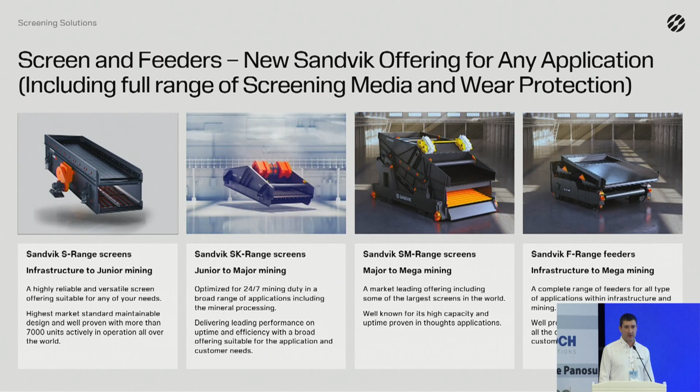And we also acquired the mining business of the famous German company Schenck, which is well known with their solutions in terms of robust screens for heavy-duty applications for big capacities within mining and steel industry. All of these solutions form a really extensive portfolio, and if previously we could call Sandvik primarily a crushing company, now crushing and screening are equally developed at Sandvik, which makes absolute sense because this equipment is equally important for mining companies.

If we are talking about screens, despite looking simple at first sight, they consist of a plenty amount of different details in terms of spare parts for metal structure, in terms of drive units, which are 24/7 under vibration in heavy conditions and heavy duties for mining customers. In a lot of cases, screens play a crucial and critical role for the entire mining plant.

So basically, if we are talking about challenges during the operations of a screen, we can form it into one question for the maintenance and reliability specialists within mining companies: how to minimize downtime and avoid unplanned shutdowns, so as not to let down the whole mining plant. This brings another question. To do this, we need to optimize the process, as well as set up a proper maintenance strategy to keep the uptime of the machine as high as possible.

To do this, we need to understand what kind of service actions are required and when these actions are required. And of course, to understand this, it's better to know the condition of the equipment, and it's much better to know this in real time.

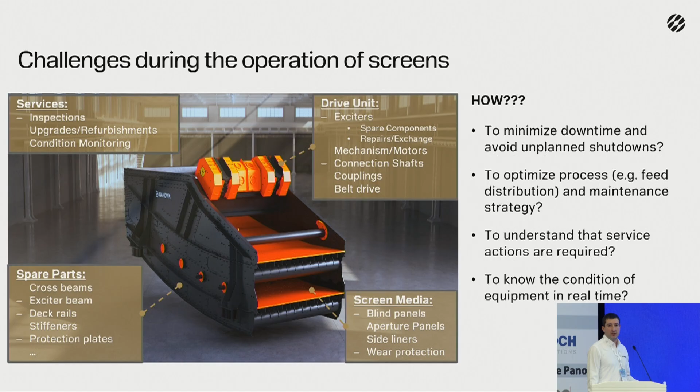To help our customers with these challenges and answer these questions, we developed our automation and connectivity system for screening solutions, which was adopted from the prototype of the Schenck mining business. If we are talking about hardware, the system consists of the following parts.

The heart of this system and the measurement unit is the state-of-the-art wireless and self-powered sensor, which combines new technologies expressed in the magnetic mount and energy harvesting functions that can receive energy from the shaking process of the machine. Depending on the size of the machine, we can use different amounts of sensors, which are basically placed on the sidewalls and exciters.

Basically, these sensors measure the screen motion in all directions simultaneously on the right side and left side, as well as on the exciter. To ensure stable and reliable connectivity and network reliability, we are using transceivers with active antennas.

Depending on the complexity, we use one to three transceivers to ensure this stable connection and to seamlessly transfer the information from the sensors to the gateway and flow unit.

In the flow unit, all calculations are made, and in case of any deviations from the threshold, it generates an alarm. We will see how this looks in the SAM platform a little bit later.

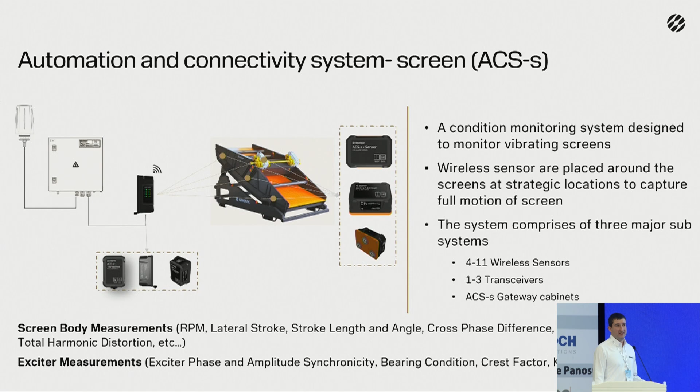Basically, the ACS system is part of the whole digital ecosystem, which we will talk about a little bit later. Data from the ACS system can be easily exported to the digital cloud infrastructure and SAM platform to provide our customers with all necessary reports, dashboards, analytics, and suggestions on how to proceed with the maintenance of the machine.

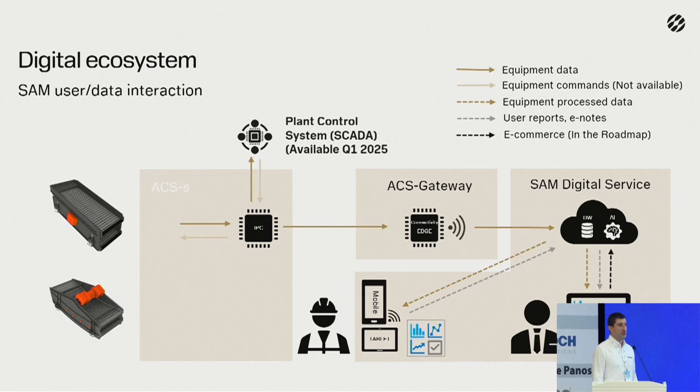As well, it can be exported to the plant control system, because we have some cases when some safety functions are bounded to this system for protective purposes.

Long story short, as a conclusion for the automation connectivity system for screening, we developed the new system consisting of state-of-the-art sensors, which gives our customers full flexibility in terms of installation and data transfer. We created the robust architecture, sensor synchronization, and many different advantages.

Altogether, it gives our customers the main benefit: you can early detect if something's wrong with your machine and prevent it until it's getting serious, and until you have an unplanned shutdown.

Besides, it's good to have data-driven maintenance and maintain the machine not according to a certain schedule, but according to the machine's condition, to keep its uptime as high as possible. Basically, that's all I wanted to say about the automation and connectivity system for screens.

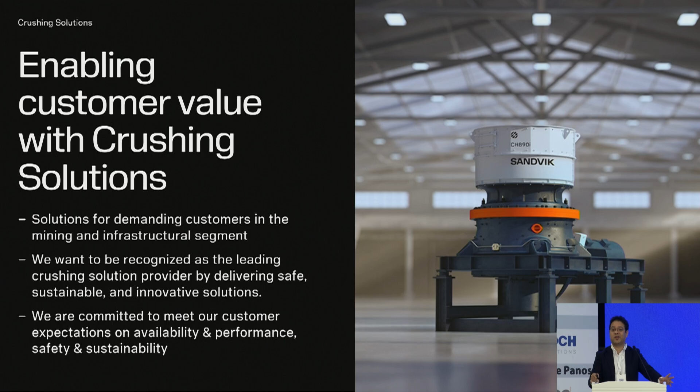At Sandvik, we want to be recognized as the leader when it comes to providing crushing solutions for the mining industry. We understand that our customers are demanding nothing more than the best operational efficiency, maximum utilization, and a machine that is not creating a headache when it's in the real sturdy operations down there in a mine.

For this, we have a comprehensive offering that goes all the way from our 800 series equipment, which includes the latest and greatest advancements in digitalization and also in hardware. These are basically used in secondary applications.

Also going through our 400 and 600 series, which are smaller yet more flexible and can be used in tertiary applications. Not to forget, of course, our jaw crushers and gyratories, which are basically used in large-scale mining applications, and last but not least, our horizontal and vertical impactors, which are used in special needs.

My name is Freddy Ramirez, and I'm really happy to be here and walk you through some of our digitalization, and show you how our hardware and software work together to be able to offer you the best experience when it comes to crushing for mining.

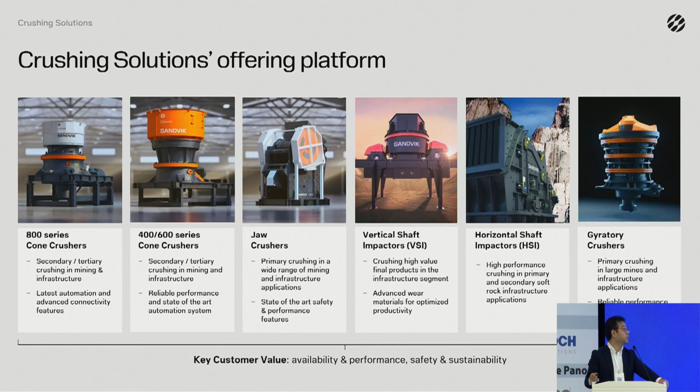The typical challenges that we face in mining operations have to do fundamentally with the ability to achieve the maximum operational efficiency. At the end of the day, we get a machine and we want the machine to last the best, to last the longer, and to be able to provide a consistent output throughout the whole life cycle.

Preventive and predictive maintenance is of the essence. We don't want to stop operations. We want to make sure that we understand when it's time to change components. We want to characterize the processes, and understanding the life cycle of those, it is of the essence.

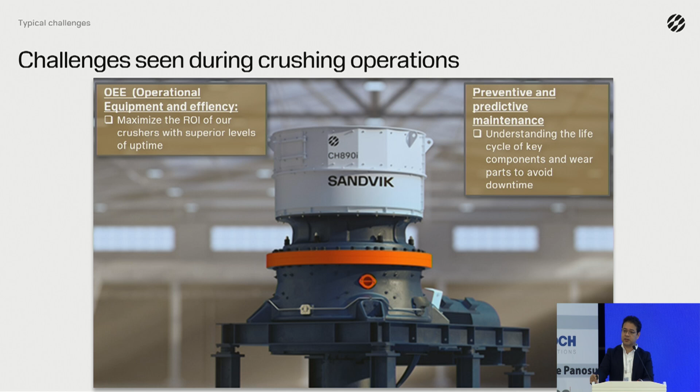Liberation of ores in mining is an important element to be able to allow downstream processes to be as effective as the processes upstream. And of course, the ability to connect to monitoring systems is also quite important. SCADA is one of them.

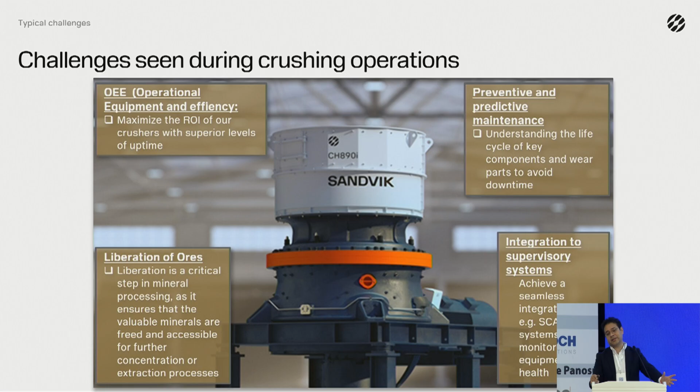And we achieve this through our ACS, or automation connectivity systems for crushers, which in a nutshell consists of having strategically located sensors in our crusher to be able to understand what is happening, what is the health of the machine at any moment in real time, that at the end of the day you can see at the tip of your fingers while you are here enjoying this event. You could also be seeing what is happening at your mine or quarry.

Through the ACS, we're able to detect abnormalities. We are able to also monitor crushing size, particles, pressure, temperature, recirculation, and at the end of the day, if the machine is being utilized at its full.

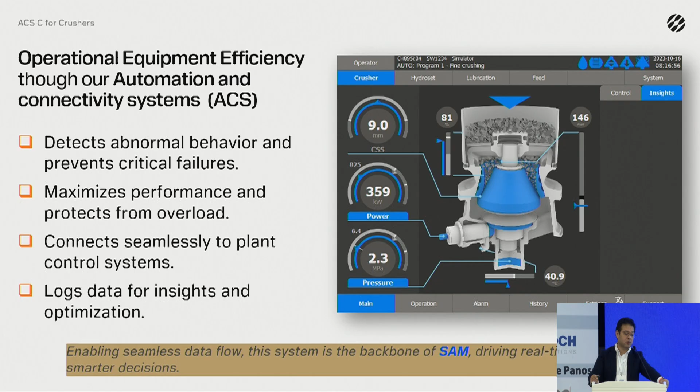Some of the features of the ACS have to do with enabling the operator to have a holistic crusher control, to have automation in terms of adjusting the wear ratio, or through enabling to adjust the close side setting to have the same particle as the machine is going through normal wear and tear. Also, it allows to have automatic settings and, of course, monitoring of key parameters. This, together with smart hardware integration, allows to provide the best maintenance service with minimum effort and time.

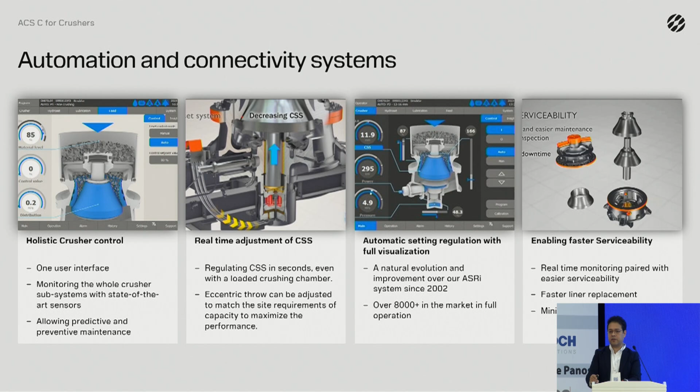ACS, at the end of the day, it is the backbone of what we're going to see as SAM in the following slides. The takeaway of having control systems of this nature is that allow us to have overall equipment effectiveness to its maximum, to also allow us to have remote support. That is an important aspect, especially when the equipment is down there in a mine, to be able to understand time to do maintenance, to optimize mean time between failures, mean time to repair. All this is achieved through our ACS.

And ACS, when it comes into what we call SAM, which is nothing more than our asset management system through digitalization, ACS is the backbone and is what allows to have our digital platform. In a nutshell, the signals coming from both our crushers and screens are going into this architecture and allows you to see at the tip of your fingers what is happening with your operations.

It's a digital assistant that allows you also to be able to understand not only the health of your machine, critical alarms, we will see that in a demonstration a bit later, but also to enable e-commerce functions so that in real time, right there, the operator or different personas dealing with the machine are able to order pieces or order key components on the spot so that you don't interrupt your operations.

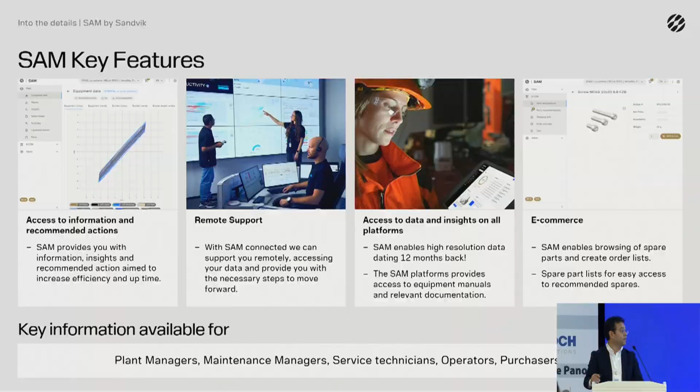When it comes to the architecture, and I will hand this over to Dmitrii, it is an important element to keep simplicity. I hand it over to you, Dmitrii. Thank you.

Thanks, Freddy. When it comes to the architecture, as it's written, it's a reliable and quite simple architecture that combines both crushing and screening circuit in one system and in one digital infrastructure.

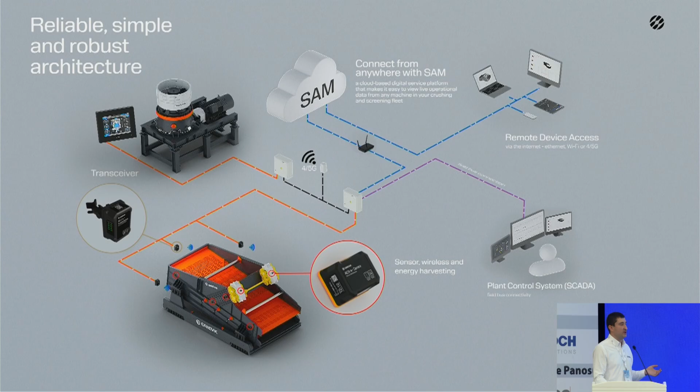Basically, we got the information from sensors, from crushers and our screens. Then, through the gateways, via transceivers, we process this information and we can send this to the plant control system to ensure the protection of the equipment in case of emergency, as well as via Wi-Fi or cellular network connection, we can transfer all the information to the SAM cloud, which is the protected infrastructure where all the customers can have access to all the information regarding their processes, graphs, trends and so on, to all the tools to make the maintenance decisions, to estimate the current conditions of the machines. And as I said, it forms the single infrastructure for the entire crushing and screening circuit.

Important to say that this access to the SAM platform is not only available on the desktop devices, but also on the mobile devices. That means you could have all the information anywhere and anytime, independently of where you are located. So that combines all necessary dashboards to make the maintenance decision as fast as possible.

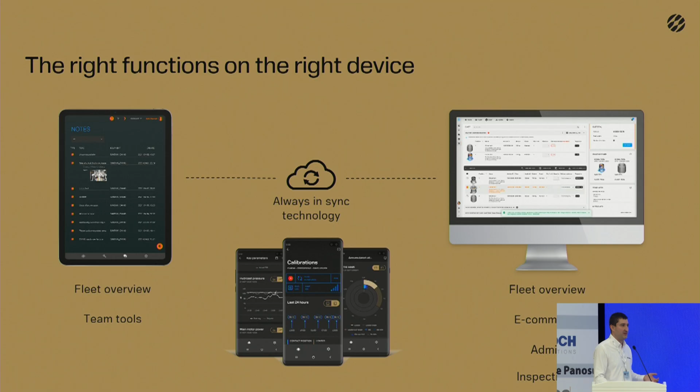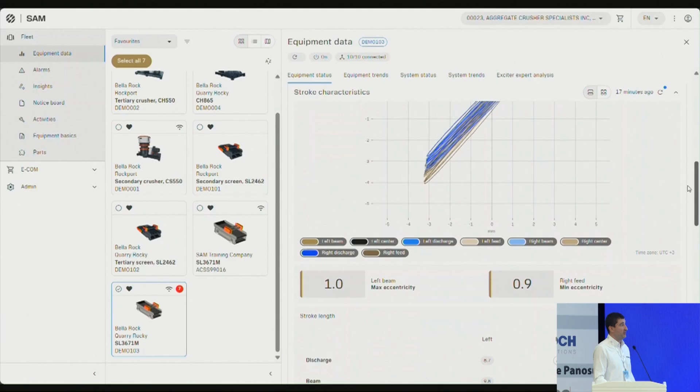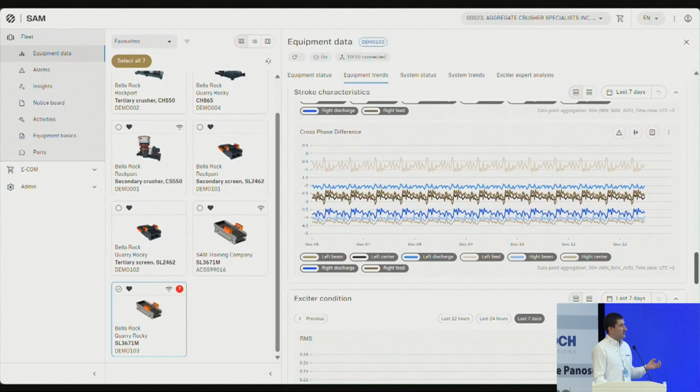At the end of the presentation, we would like to provide you with a short demo of how the portal, the SAM platform, looks like. It consists of plenty of information required for the maintenance and reliability team, different graphs, different trends during the time, which you can zoom in or zoom out if you need to see a certain time range. That's really important for maintenance and reliability specialists to estimate the screen performance, to estimate how the machine looks in terms of reliability.

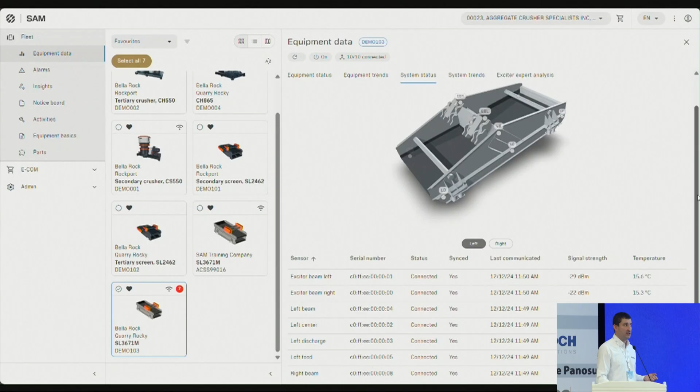Besides, it has the system diagnostic, meaning the automation and connectivity system itself, including the signal strength, battery charge, sensor temperature, and uptime of the sensor, so you can see information about this. Importantly, this is really useful for non-trained staff like operators, because it generates alarms that are easy to understand, providing a description, potential reasons, and possible actions to mitigate the problem.

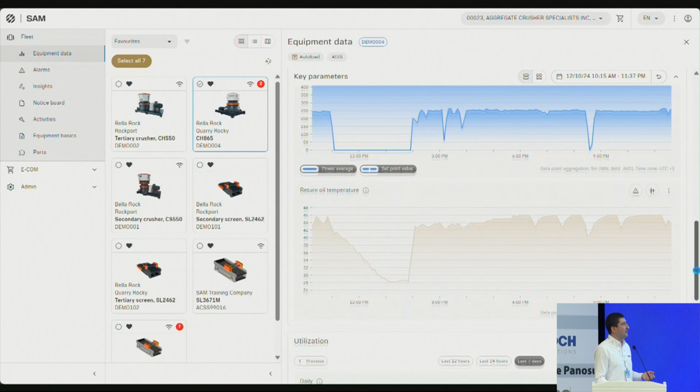And we see more or less the same for crushers, but with their own specific KPIs relevant for crushers, also graphs that can be zoomed in or out over time, performance characteristics, utilization, energy consumption to estimate how energy efficient it is, and of course alarm logs with the description of the reason, consequences, and potential action.

So altogether, this provides our customers full insight about their crushing and screening fleet and full flexibility in terms of the decisions they can make during the operation of these machines.

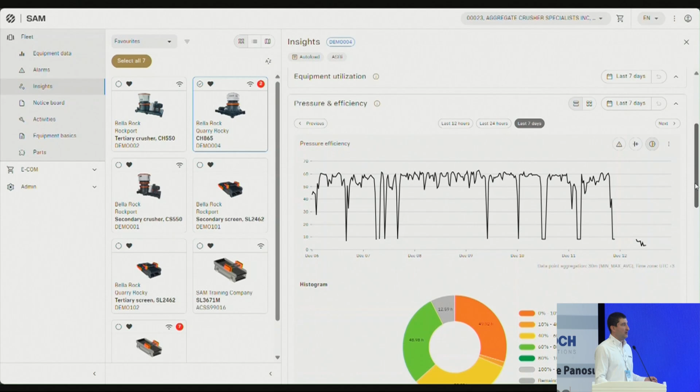So yeah, that's plenty of different trends. And it's also important to mention once again the e-commerce platform, so you can see which spare parts are recommended to purchase for this exact machine when you have any problem with it.

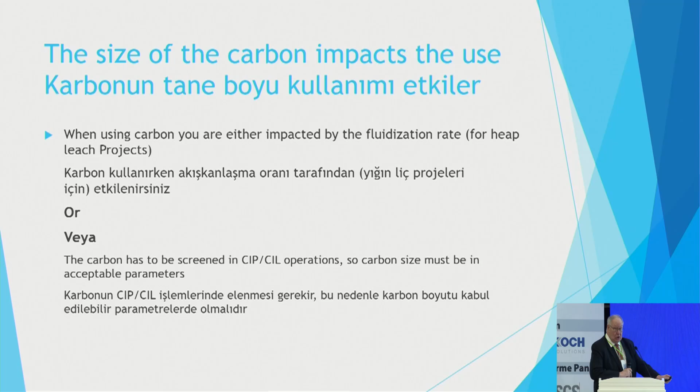I did tell you shape matters, didn't I? Well, if carbon is too flat or breaks too easily, you will lose carbon. As engineers, lost gold is lost revenue, which should be avoided at all costs. More of this we'll discuss later.

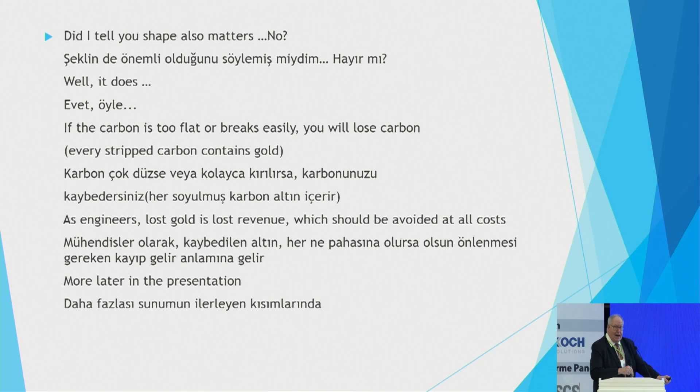Now, this is going to be a very general talk, because a lot of people in the industry only look at carbon as something black that's in the process. They're not worrying about its strength, its size, and different things like that, which are important and don't take very much effort, and have a very large value return if you take care of your carbon.

I mentioned in my first statement, hardness refers to the carbon's resistance to breakage and attrition.

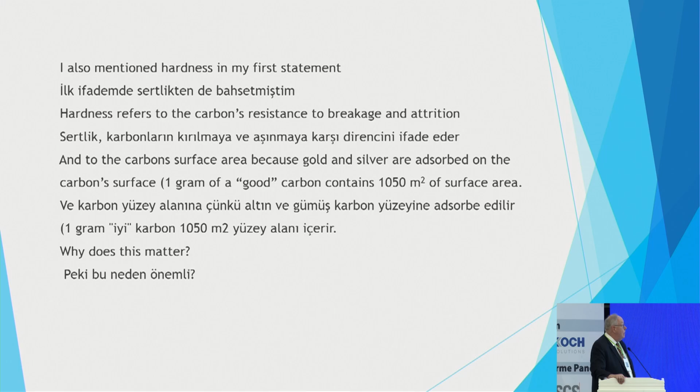So why does this matter? Coconut shell carbon is the carbon of choice in the gold industry. In the early years of carbon recovery, the industry tried everything: almond shells, peach pits, plum pits, coal, coconut shell, etc. Coconut shell was found to be the best carbon because it had the most micropores, and the gold is adsorbed within the micropores. That's why the carbon of choice throughout the gold industry, except for people who use Norit, is coconut shell carbon.

The way coconut shell carbon is made: they crack the coconuts, take the meat out, which they make into oil and coconut to eat, and take the shells, which is a throwaway product. Then the char people, a bunch of entrepreneurs, go dig a pit, put a pipe in there to let some air in, throw the coconut shells in the bottom, set up a way to start a fire, and bury the coconut shell. The slow burning of carbon in the coconut shells pulls the oxygen out of the cellulose of the carbon, and that material being removed leaves the coconut shell microporous in the material.

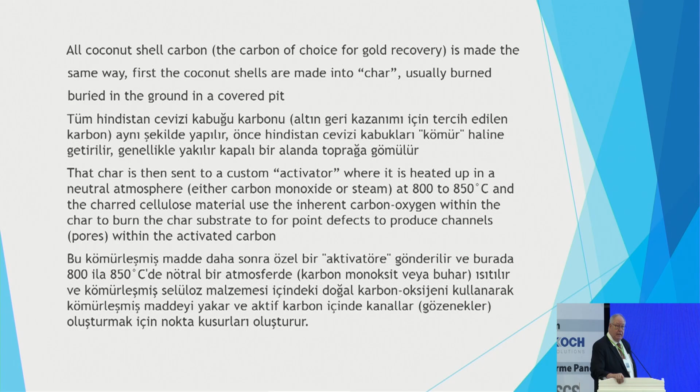That char is then sent to an activator, where it is heated up in a neutral atmosphere. The neutral atmosphere is usually carbon monoxide coming from the burning of the cellulose. Since it's in a deficit of air, it will make carbon monoxide, not carbon dioxide, or steam. If there's any moisture in there, the steam comes up and the oxygen is displaced. At 800 to 850 degrees C, the cellulose material uses up the inherent carbon oxygen in the cellulose fibers and makes the activated carbon shells.

If the carbon is activated too long, greater internal surface is produced and the carbon becomes weaker. It breaks as the carbon particles hit themselves or hit the agitator. When they break, they're smaller particles, and they go through the screen and into your waste. Everybody has fine carbon systems, but it's very hard to get rid of your fine carbon. Most people don't want it because of the mercury associated with it, especially in Turkey.

So there's such a thing as too much surface area, because the weaker, high-surface-area carbon decrepitates, causing loss of your product gold. It's incumbent upon the process engineer to balance the size, shape, hardness, and activity of the carbon. The lower the activity - if you look at the CTC, carbon tetrachloride test, you take a specific weight of carbon, pour carbon tetrachloride on it, pour that material across the screen, put it on a balance, and see how much the weight increased. A CTC of 50 means it absorbed half its weight in carbon tetrachloride. This is used in the industry to discuss surface area.

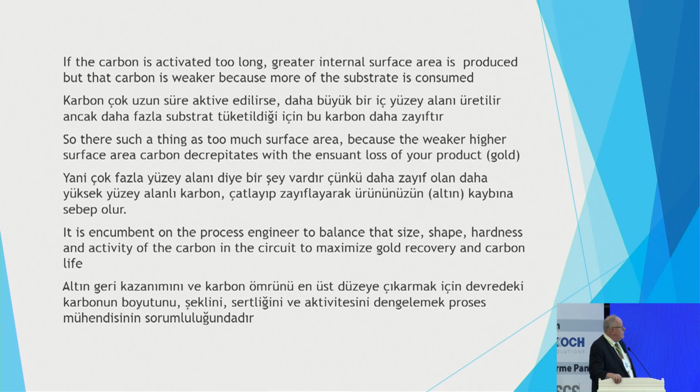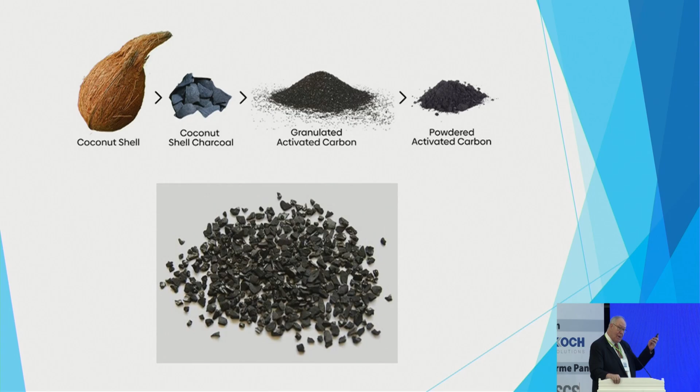How do you make a good decision on the carbon you use? You start with the carbon supplier's specification sheet. See next page. Coconut char, granulated carbon, and for water treatment they use powder carbon. This is what about a gram of carbon looks like.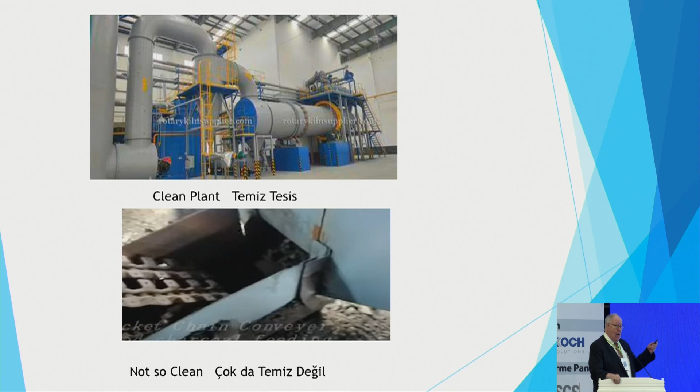If your carbon is too small, the fluidization rate is too high, and you keep moving the carbon downstream. But when you operate it, the solution with the high grade goes from top to bottom, and the carbon goes from bottom to top. It's a counter-current operation for recovery of the gold.

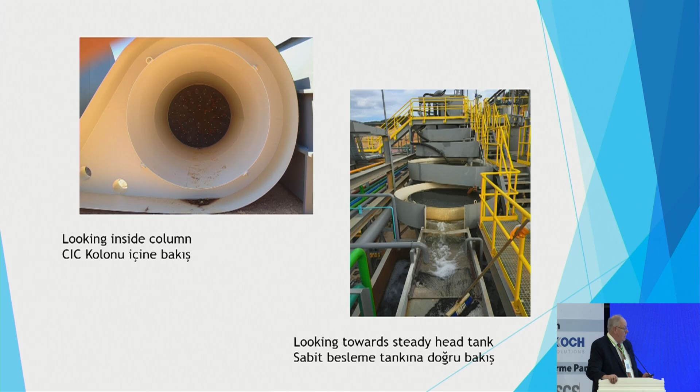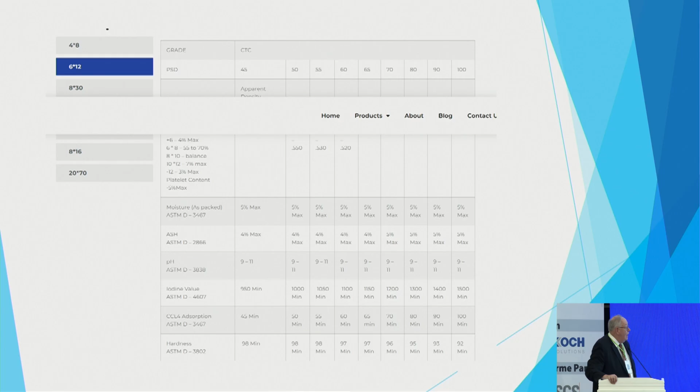The hardness test: you take your carbon, put it in a screen, and put steel balls on top of that screen. Then you put the carbon in a rotap for a specific period of time, and the amount of carbon that comes down under the screen is considered the attrition. That's good for road base, but it's not good for carbon, because most carbon, when it breaks down, doesn't break down below 80 mesh, which is 200 microns. And they use a 200 micron screen, so no attrition shows up - look at that, 95%, 98%.

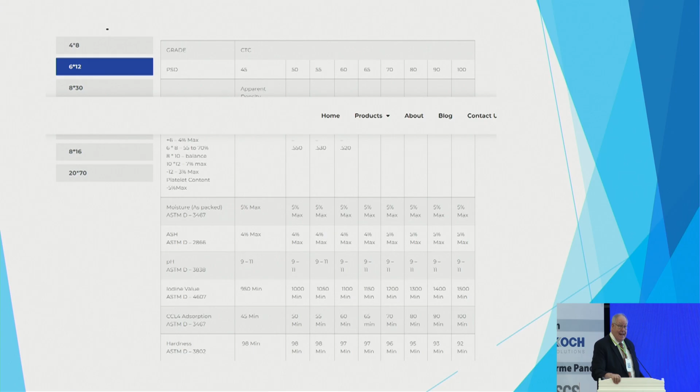That is not a good test, but every carbon manufacturer will give you a ball pan hardness test, by that ASTM number. You have to have your own set of tests.

This is the set of tests we used, which I helped develop at Barrick Gold, the Goldstrike project, and used throughout Barrick - one of the largest, if not the largest, gold producer in the world. We looked at the square mesh material, but we also had slotted mesh screens come out, because carbon breaks into platelets, since if you look at the coconut shell, they're fairly thin.

When it breaks, it breaks along that plane, and you'll have particles that are thin but larger than the square mesh screen, so they won't pass - it looks like you don't have any particles that do that. But if you look at the slotted screens, you'll see the screen analysis moves down much further, and almost all carbon screens in a gold plant are slotted screens. So you have to be aware of what you're doing. You can't just say, well, my square mesh screen says this stuff is good, and then you go in and lose 18% of your carbon as you wet it and push it across your first primary screen.

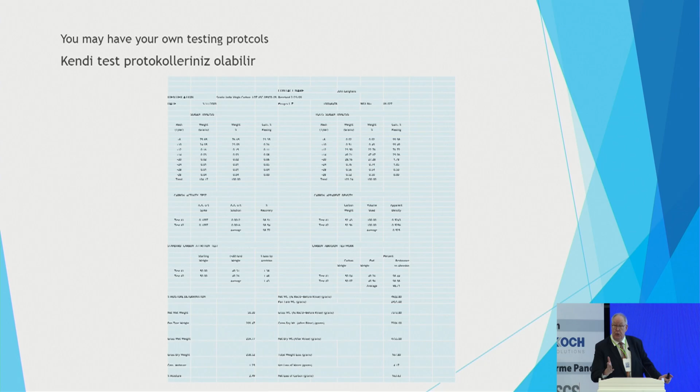Very simple test, very good information. It tells you if you're regenerating properly or not. Very simple things to do without big fancy equipment to tell you it's this or that. And I'm not against big fancy equipment, but I'm more interested in equipment that does a job and doesn't cost you too much money.

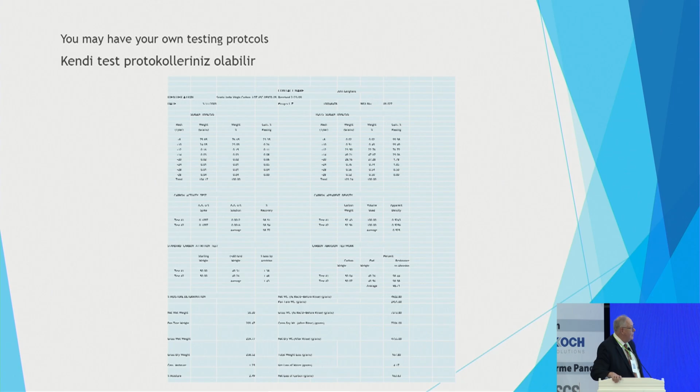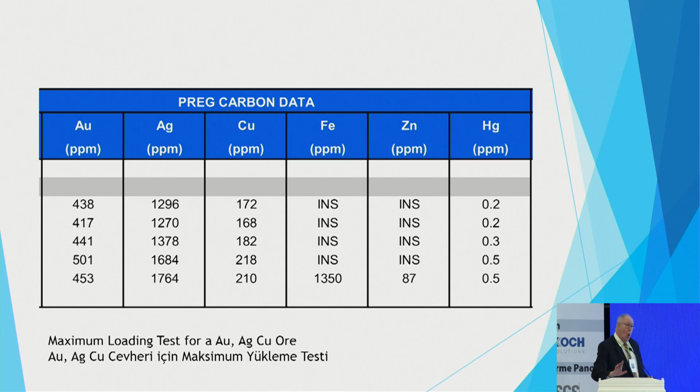Yeah, I'm almost done. This is the gold adsorption that you can see. With copper in the process, the amount of gold you have is going to decrease. And sometimes people are using 2,000 grams per ton or whatever. You have to know that all the metals are in there to come through.

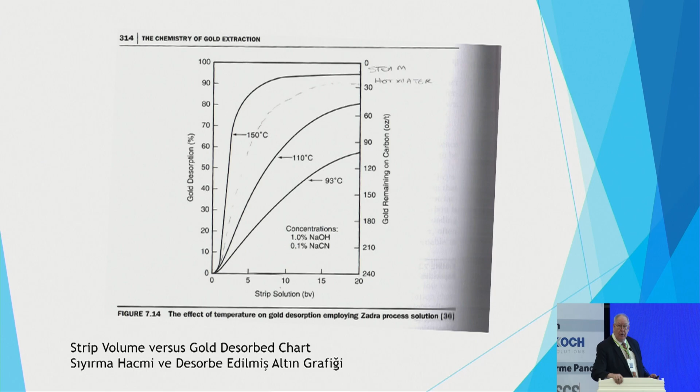This is from Marsden. It's a strip curve. It tells you how many bed volumes you have to achieve stripping at what temperature. This is a very good table for an operating engineer to have.

What's happening is that we have a technology that is exponential, so it grows really, really fast and it just accelerates. I've been doing this for 18 years, as I said, and we're standing on each step as it goes up, and it just goes faster and faster. The challenge is that people are not necessarily evolving equally fast as the technology.

So we're getting a gap between them, and that causes stress, stress in terms of business but also in people. It's important to think about this when we're looking at the technology. But it's also important to see the other side of things and get active when it comes to this technology, because it creates a vast amount of opportunities. If you take back the story about internet, those companies that got active with internet early on had a lot of value and made a business out of it. The ones that did not get active and use the opportunities, they failed when it came to internet.

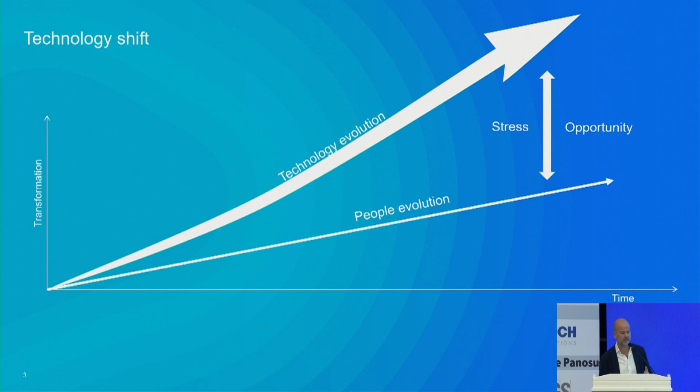There's a lot of talk about chatbots and what we can do with that, and all of the focus on AI has come to pass on that area. But AI is so much more than the LLMs and the chatbots. You have a technology that can do what we people can do, but it can do a lot more than that too. It does optimization better than us. It can help us with scientific discovery and evolution. So it's going to be a technology that impacts everybody from all kinds of angles.

But there's also a lot of things you can say about it, and there's an expression that not all things that glimmer are gold. The same goes for AI. So there's a big difference between AI and AI, and I thought this might be interesting for you to reflect on. If you look at this graph, you have benefits on one axis and complexity on another axis. I've tried to generalize a little bit about the different types of AI you find out there.

And it can be really important to make the distinction. So on one level, you have visualization, which is actually not even AI, but is often sold as AI. You have predictive analytics, simple, very much a man-driven type of analytics that becomes predictive. You have specific predictions that are more advanced and more complex, but also give a little bit more value. You have the APCs, which are well known, based on linear approximations, and have parts of it where you have to update them continuously.

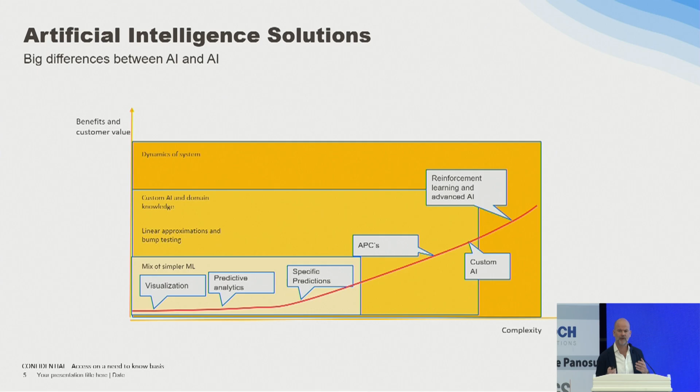So then you're looking at the more complex types of AI, like reinforcement learning and these types of things, and then you also can get a lot more value out of it. It is more complex, but you get a lot more value. So I thought this was hopefully a little bit useful to get an idea of what it could look like, and things you should be looking for when you're evaluating various projects.

All right, so let's get into what you can do with this in a processing plant. There's a lot of different types of things you can do, from equipment monitoring and analytics, and taking it to the next level, you have the predictive maintenance type of things and anomaly detection. Then we get to AI-based intelligent assistants and things like that, that can help you with optimization of the processes. And that's the production side here in the middle.

But you can take it even further and integrate it into other types of processes, things like debottlenecking with the AI and so on, and integrate that into your tools. Using these kind of more advanced AI technologies to simulate the processes and get a really good view of your process. And finally, you can take it to full plant optimization, basing it on the intelligent assistance and these kind of technologies and simulations as you go all the way to a holistic plant optimization.

If you're considering doing AI investments in this kind of technology, I thought it would be useful to summarize the benefits we're looking at. On one side are the obvious ones, the process optimizations you see every day: increasing throughput, stabilizing P80, reducing cost, and also increasing equipment availability through monitoring and these kinds of things.

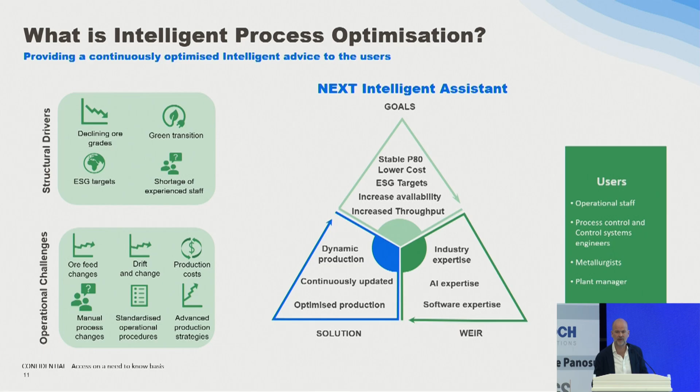So two examples of this. One example is an HPGR intelligent assistant. If we look at what it can do, we're looking at things like ore grindability soft sensing.

Soft sensing is a concept not everyone may be familiar with. It's a situation where if you do not have the ability to put a sensor in a particular place, it could be difficult or expensive to do that. You can actually, in many cases, create a virtual representation of this sensor, so it's like a virtual sensor, or what we call a soft sensor. We use that extensively in these solutions.

By combining mathematics and AI with the data from the process, we can reach this level. We do product size estimations, we do various predictions, but we also help metallurgists with what-if scenario planning, so they can play out and simulate what is going to happen in the process, allowing them to make intelligent decisions around how to optimize production.

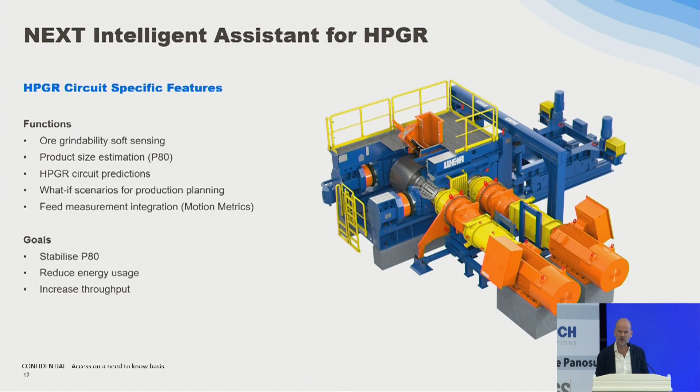And that is in order to reach the goals we're looking for: stabilized P80, reduced energy consumption, and increased throughput. So these are typically the kinds of things you can get from these intelligent solutions. Another example is a mill circuit equivalent, a mill circuit intelligent assistant.

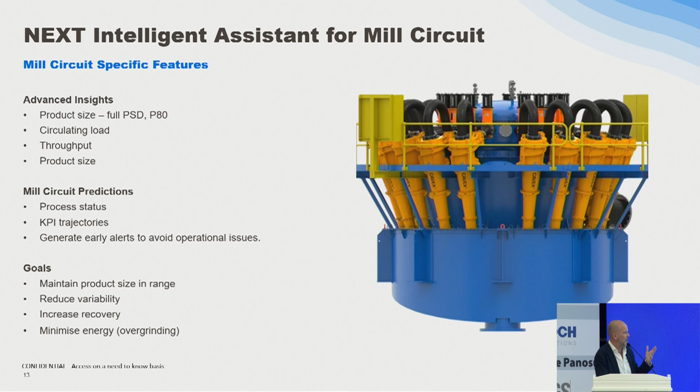There you get things like advanced insights to your product size, circulating load, throughput, and product particle size. We do various kinds of predictions in order to get there. In the end, the idea is the same: we need to get to the goals of the processes. In this case, maintaining the product size, reducing variability, increasing recovery, and minimizing energy. So that's all what you would want from these kinds of processes.

So let me finish off by demonstrating quickly what this would look like in the case of an HPGR intelligent assistant. The kinds of goals you have when looking at that for an HPGR is to get set point recommendations, or if you want, have them automated in an autonomous set point generation.

Alerts for process drifts, alerts for disturbances, help with stabilizing your standard operating procedures, wear monitoring to keep track that you make the targets of when you're going to do your next maintenance on the equipment, and so on. So there's very good reason why you would want to do this.

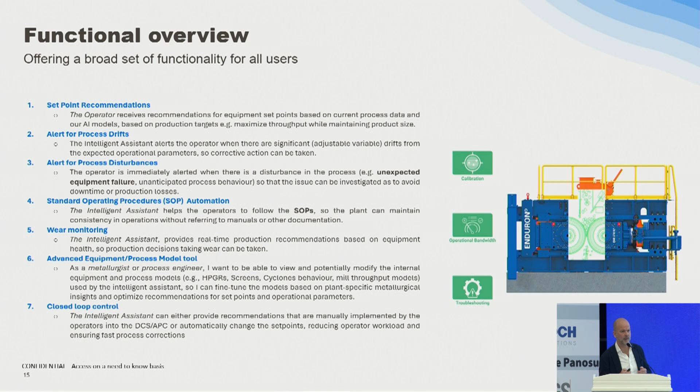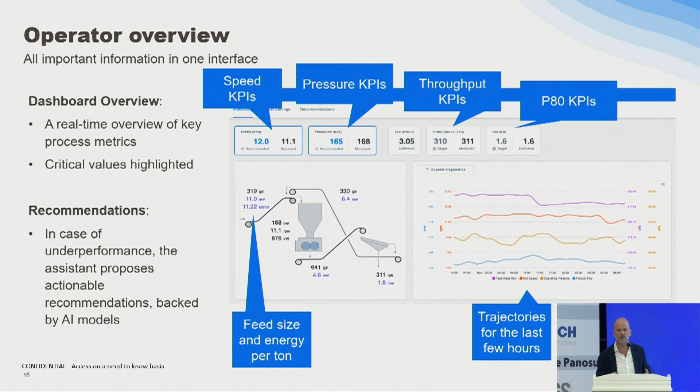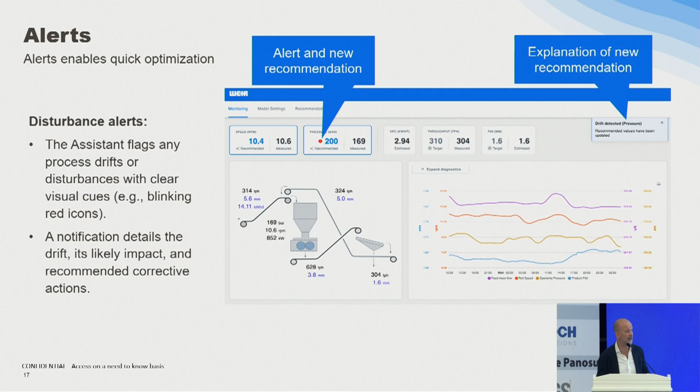On the other side, we have speed and pressure. And as the ore feed changes and there's disturbances and so on, the process changes, it will automatically identify that. On a continuous basis it tracks this evolution, and then it allows the operator to immediately execute the recommendations. It will even give you alerts. If something really goes off track, it should be notified earlier, and if you have it automated and autonomous, it obviously happens faster. But the tool is not only for the operator, it's also for the metallurgist.

So in the case that, which is usually the case, you don't have all of your data digitalized, some of these things are coming from lab samples, for instance, in which case the metallurgist can input that, simulate what's going to happen when that takes place, update the model and send it in. So we make sure that even non-digital data is used to update the models, to keep them accurate.

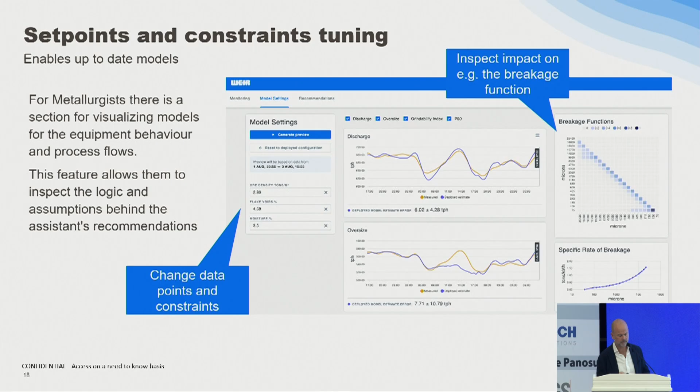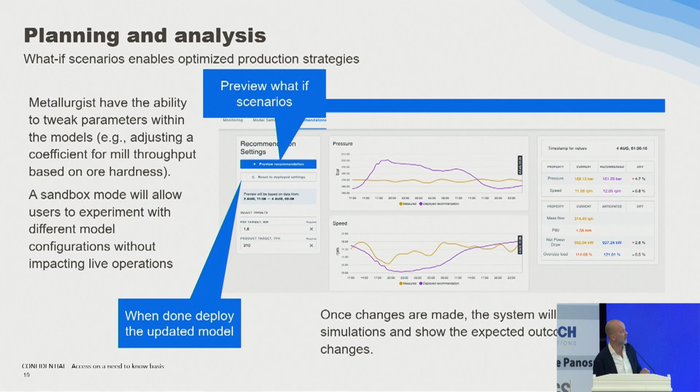And finally, we will also help the metallurgists with simulating these processes so that they can look into the future and predict what is going to happen to the process and get a really good view. So we call these what-if scenarios, where they can play out several scenarios of what's going to happen.

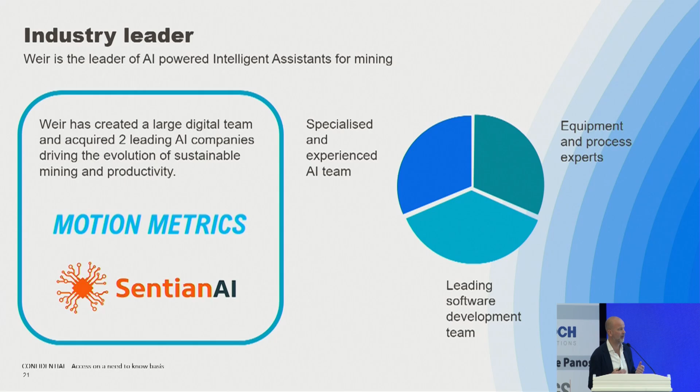So I wanted to finish this presentation off by saying a few words about what we're doing at WEIR. When it comes to this, we are mostly well known for our pumps and cyclones, maybe for the HPGRs too. But what we've been doing for the last few years is putting a lot of effort into acquiring capabilities in AI. We've even acquired two companies, one was mine, Sentian AI, and the other one was Motion Metrics. So we have a big team of AI people in the company. We've had a lot of experience, and this is crucial for AI solutions, you have to have the experience. And we've combined that in order to create these solutions.

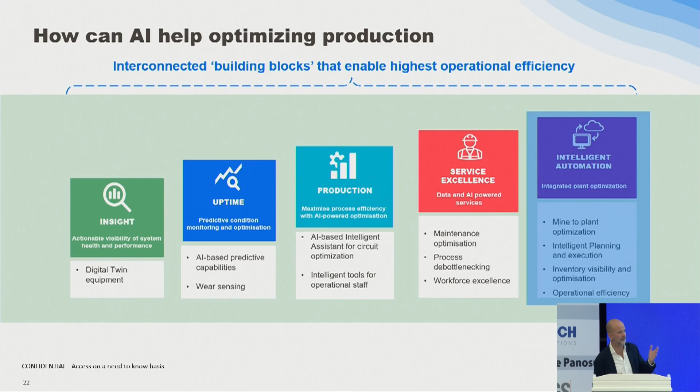And already today, we at WEIR can offer solutions all the way up to there, and we will soon also deliver the end-to-end holistic processing plant optimization.

So I don't think we have any time for questions, or? Any time for questions, or we're good?